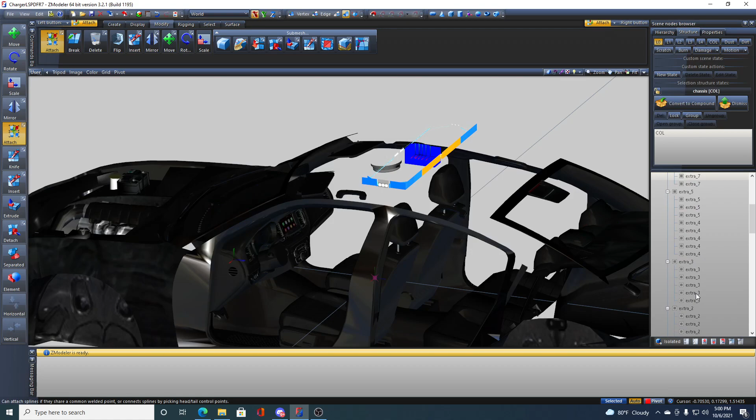I already have all of my extras opened up, so I'm going to grab all of these real quick. What we're going to do first is go from here all the way down and hide all of this stuff, and also hide the chassis, because really the only thing I need is the lights. I'll also tick on the light bar as well.

As it sits right now, all of the LODs are open, they're not compounded or anything like that, and the dummies are placed up here. This first piece right here is the dummy. So if I was to uncheck all of these, you'd be left with just the lights.

Of course, you have to have your dummies on the bar, and actually this one here needs to be moved up. Speaking of dummies, you don't have to move these around, you can leave them exactly where they are. If you were to make a new one, which is the dummy helper, create a dummy, it's going to place it right in the middle of the scene, in the middle of the pivot helper. You don't have to move these, just want to make that very clear.

I personally like to, just so everything is kind of grouped together, organized and neat. But with ELS, you don't have to move the dummies around like you would for non-ELS setups. ELS is very, very simple and very straightforward and to the point.

But I'm going to go ahead and move this dummy right here. I'll grab it on the X and Y axis, untick my little thing down there, and move it up into the light bar, just so it's in the same spot as everything else. Then I'll look at it on the front view to make sure it's where it needs to be. Yep, everything's good, perfect, now it's placed where it needs to be.

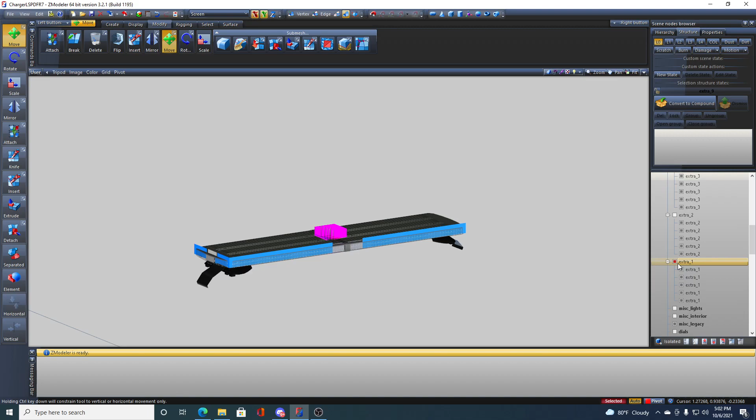So what you'll do is make a dummy for each light. If you don't know what dummies are, I like to call them the placeholder for all of your objects. Every single object that you have on a vehicle has to have two main things: it has to have a dummy, and it has to have LODs.

Now, some people will argue you don't need LODs, that you don't have to use them, just modify your metas and things like that. But if you are going to make a vehicle properly, in order for it to work properly with the game—because I don't know if you guys mind it or not, but I personally don't like seeing a car come down the road with nothing but wheels and a driver floating.

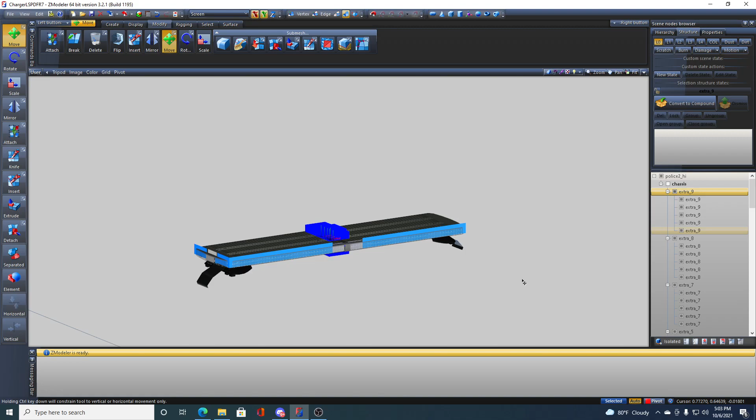That's essentially what will happen if you don't do LODs—you'll have little pieces just all of a sudden pop up and you don't have anything else. It's essentially your level of detail at whatever distance it's set at.

L0 is very, very up close. L1 is about like so. L2 is about here, L3 is about here, and L4 is really far away. What these are for is to help with game performance. If you have 200,000 polys and use it for every single LOD, you're going to be streaming a 200 plus thousand poly car at hundreds of feet away. It's not good for game performance.

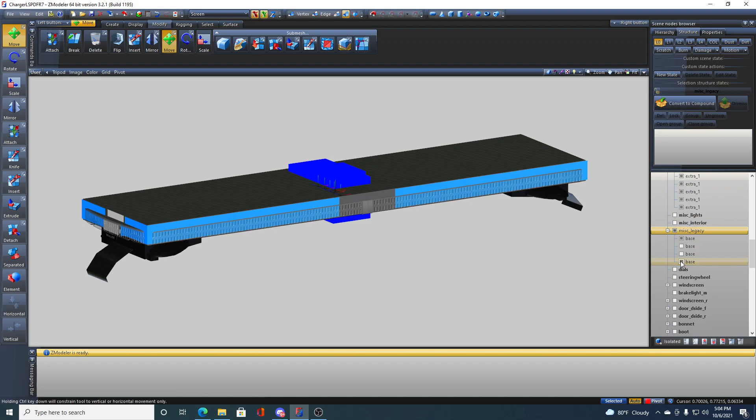So again, two main things you need: dummies, LODs. Everything has to be compounded. You don't ever want to take, say, a light bar, dismiss it, and have just this floating with no compounding, because then it's also not going to work properly when it comes to collisions and things like that. So you always want everything to be compounded no matter what it is. If it's a simple push bar or something, even if you don't want to compound it, attach it to the bumper at least. That way it will still use that collision off of the bumper and work as it should.

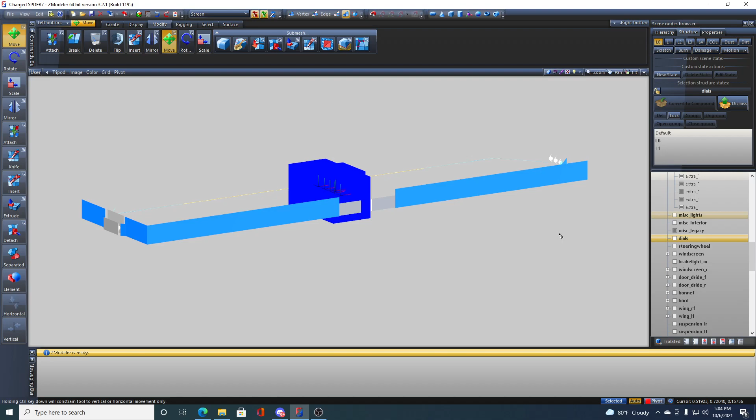But anyway, back to the lights. I've got all my extras already done. Most light bars will come set up just like so, and untick all of these. If whoever made the light bar was a decent modeler, most of the time they'll do the LODs for the lights for you, such as this one here—this is 5.0's Legacy, he did a really great job on this bar and done all the LODs for the lights. But sometimes you'll get a bar that's set up just like this, with no LODs, no nothing—all you have is just your regular L0. If it's set up that way, that's fine.

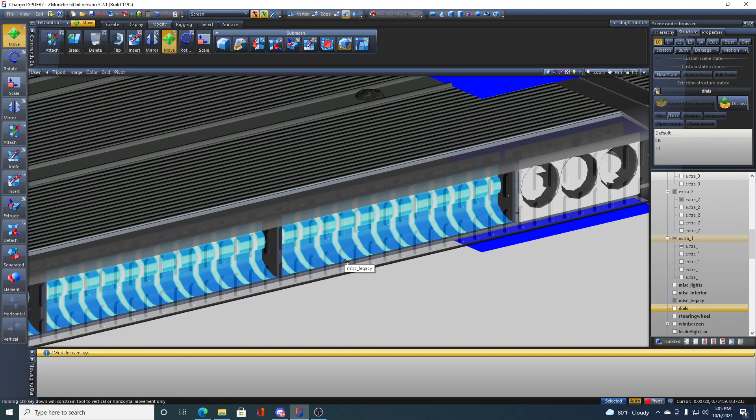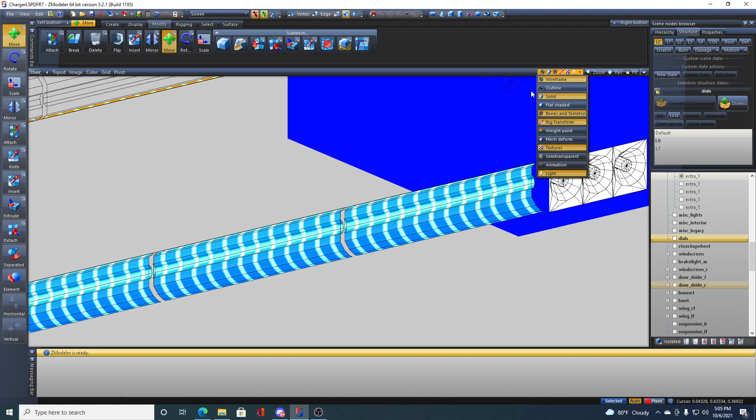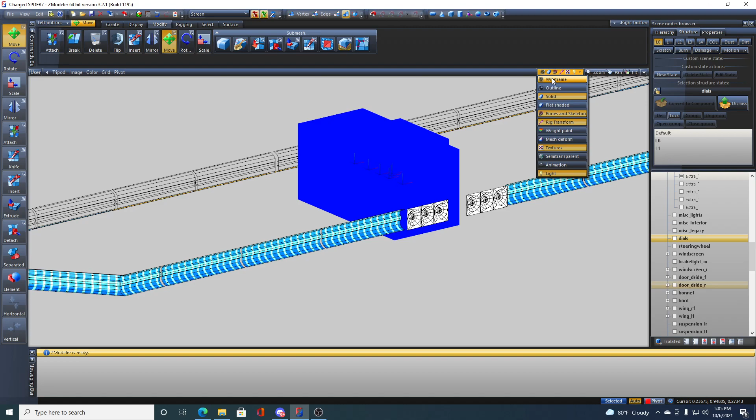What I will normally do is take a copy of my L0 and use it for my L1. After that, I'll either crunch down the lights here—let me hide the Legacy—so there's not a million polys, or I'll just take and create a box, get rid of the back face, and use it for the rest of them. Either way works. If you take all of these and copy them throughout the whole entire thing and use it, that's okay, because it's just lights. If it's a whole entire piece for a car, it's a little different, but in some cases you can get away with copying your L0 all the way through, and in some cases you'll do it for lights.

Some people like to have the more detailed looking emissive, because I think it gives off better detail in game, or whatever the case may be. But for bigger things, of course, always do your LODs there.

And we have an autosave. But anyways, I've been talking for probably 5 minutes and haven't actually showed you what to do, so let's go ahead and jump into it now. Just some little background things, of course, that you need to know beforehand is essentially what all of that is.

So what I'm going to do here is grab all of these extras and pull them up. I've got one of these—it's a little off, I believe, but it's okay. Let's grab all of these here. I'm just going to turn them on, just like so. So now everything is selected.

How you'll set up your lights normally is you're going to make your dummies for each extra. I have extras 9, 8, 7, 5, 4, 3, 2, and 1. You can go all the way up to extra 11, I believe it is—12? I don't know, it's been a while since I've done this.

But you can go all the way up to that for lights. I just have these selected because the lighting setup was very minimal. I had a certain way I wanted to set up my stage 1, stage 2, and stage 3, and most of the lights were all attached together.

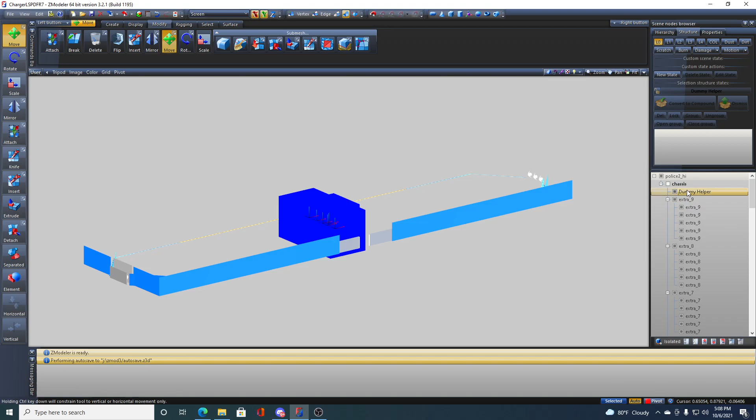There we go. Okay, so you've got a dummy here. I'm going to hide all of these. You've got a dummy you just made here. You can move it to whatever position for your light, and I'm just going to make a little box real quick, just like so. That essentially is going to be my object that I'll be using. It doesn't matter, it's just an example.

So what you'll do is you're going to grab a copy of the box here. So you're going to go to create, copy, and this essentially is going to be your light. I'm using the box as a placeholder, but it's the same concept no matter what.

So you have your first box here. Make one, that's your L0. So you're going to make L0, L1, L2, L3, and L4. You're going to grab that 5 times, so you're going to have 5 boxes in total.

Okay, I'm going to go down here, grab all of these. I'm going to move it up to the dummy helper, pop it in here, and then of course you would name it the respective extra name.

It can be extra_10, you know, and that's one thing too, I'm glad I just named it that. The only extra you ever have to name, like actually name it, is extra_10. It won't work if it's formatted differently. It doesn't work in game. Don't ask me why, I don't know, it's just the way the game's set up.

You'll name your dummy the same thing, extra_10. Now technically you don't have to name your LODs. They can be named apples and whatever you wanted to name it, and it'll still work properly, just so long as the dummy is named what it needs to be. For the sake of this, I'll name these together just like so.

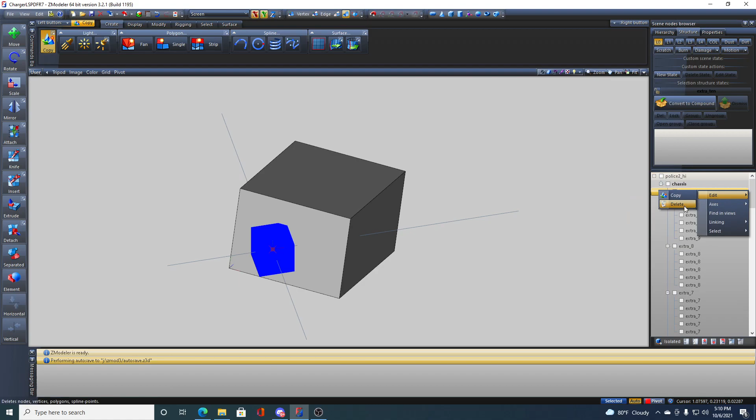And then from here, you're just going to compound all of your objects. Now what I'm going to do is delete this, and I'm actually going to compound my actual lights themselves. I'm going to hide all these down, because I'm going to do show all. Get rid of that, and then from here, go down, and I'm doing shift and then clicking, and then hiding everything. So now the only thing I should have left is my lights again, as we started.

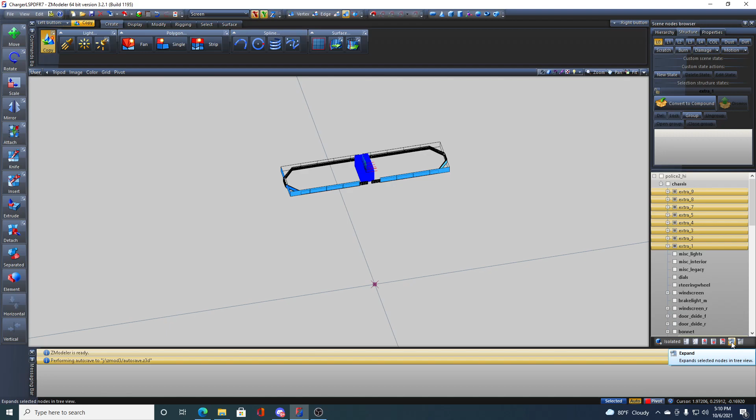And from here, I'll grab this, shift click there, and I'll grab this little button here, which is the expand button. It expands all your nodes in the tree. So you set up your lights, you've got everything here. Most of the time you'll have lights.

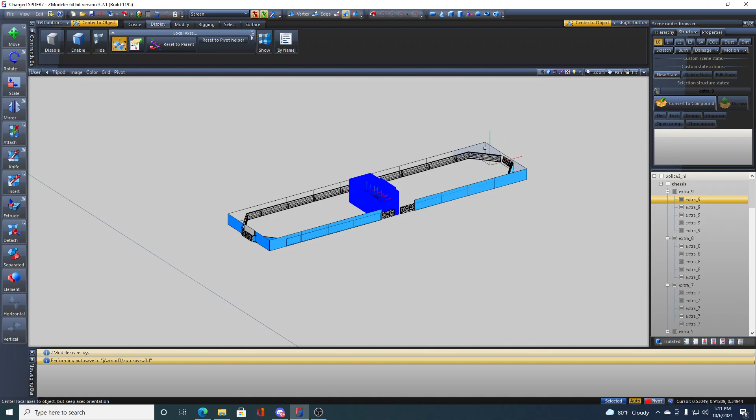If I do say this here, and I go to display, and I go to center, most of the time your lights will be set up like this. This isn't a very important step with ELS. I always do it just so, again, I know that everything is going to work smoothly.

What you're going to do for this is, this is your axis essentially. If you were using non-ELS, this is very important. For ELS, again, it's not important at all, but I always center them to the dummy anyway.

But you'll normally be left with something like this. You'll have maybe another one here set up, and it's one's here, one's there, whatever. What I normally will do is take all of these, grab each one that's not centered, and I will click on reset to parent, and then just click, and it'll reset all your axes to the dummy itself.

Now, when you want to compound an object, I'm sure most of you already know how to do this, but of course I'm going to show you anyway.

If I'm going to compound extra 9, what I always do is tick your L0 off, grab your dummy, convert to compound. Make sure that the L0 is off, or any sort of LOD in that general sense, because if you do that, then your dummy is going to be your L0. Then this is going to be L1, L2, L3, and L4, and it just won't work properly in game.

So make sure your dummy is set as default, then click on the lock button here, click on L0, click and drag. L1, click and drag. L2, click and drag, move that down a little bit. L3, click and drag, and L4, click and drag.

Now you should be left with everything working as it should. You can click through your LODs to see. L0 is set up here, L1, L2, L3, and L4. Works exactly as it should.

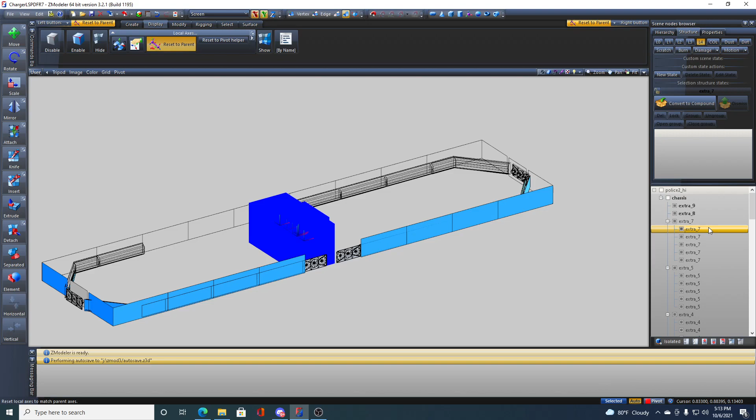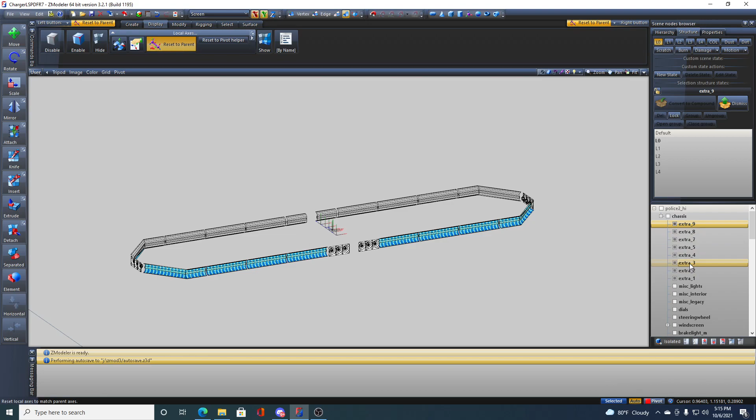Right, so I've just finished up everything. This is how your lights should look whenever you're done and you have the L0 selected. By the time you're finished with doing all this, all of these should also be bold, to let you know that everything is compounded. What you can do after that is tick through your LODs. So this is L0, L1, L2, L3, L4, and autosave.

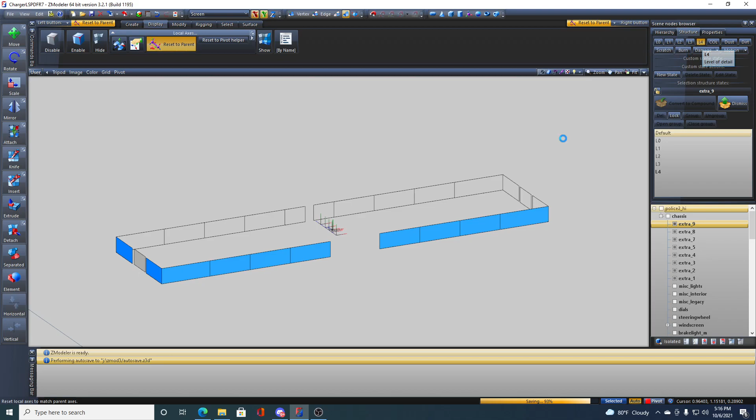Now once you click off of the LOD and there's nothing there, you should see all of your dummies in the same place that you had them to begin with. Once, of course, it's not. Now click off of L4, boom, all you have is a dummy.

So how your light bar should look is it sits on the car. I'm going to turn off wireframe here so you can still see it. You currently have this. If I go into L1, it'll go down, L2, L3, and L4.

Now at L4 there is no light bar, obviously, because at L4 you are about this far away. If I go into 3D mode, all that stuff won't be there. You're probably this far away from it, so you can barely see anything. So having the light bar there obviously is not important. I'm going to reset that pivot, reset to origin. But that's why they're just sitting there floating.

For any other LOD, you don't want to have floating lights. But for L4, you can get away with it because it's a really far distance. So you got that there. That is all you have to do. That is literally the easiest thing you could possibly ever do is ELS.

Non-ELS is a lot more complicated. Most people use it though because of FiveM, or they have their own server, or whatever it may be, or they use something like live lights and things like that to customize it. You can do all of that same stuff with ELS. It can get a little tricky whenever you're editing XMLs, but they're pretty straightforward. But that essentially, in a nutshell, is how you set up your ELS lights.